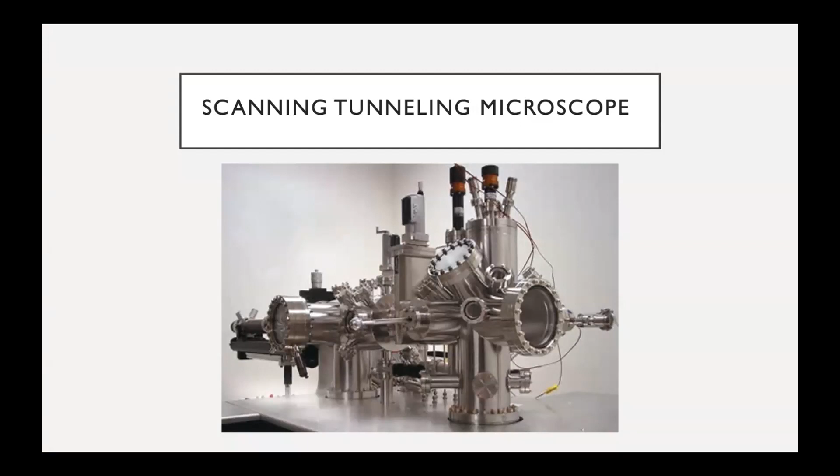Second, nanofluid, with my friend Abdulaziz. Assalamu alaikum warahmatullahi wabarakatuh. My name is Abdulaziz Al-Ghamdi, and today I will be presenting nanofluids. Nanofluids are just fluids containing nano-sized particles, which can be designed and engineered to serve different functions. It is also considered as the future of heat transfer fluid. They are expected to give better thermal performance than conventional fluids due to the presence of nanoparticles which have high thermal conductivity. Next slide please.

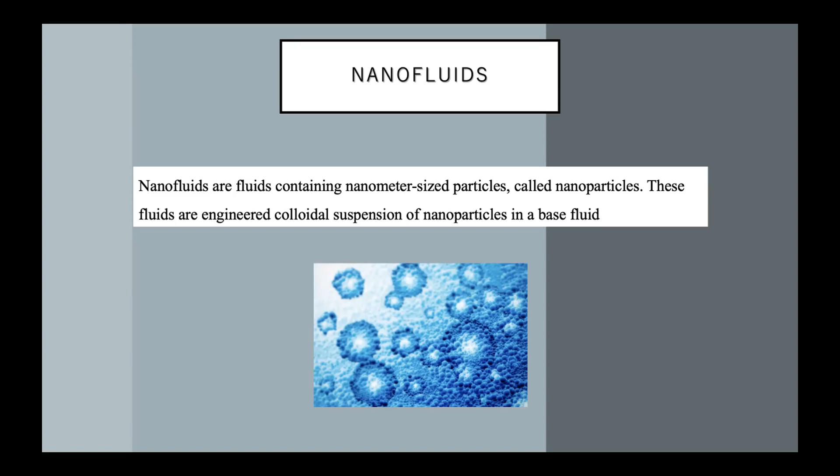Types of nanofluids. Nanofluids can be classified into 4 distinct categories based on the type of dispersed particles: metal nanofluids, metal oxide, metal hybrid, and carbon nanofluids.

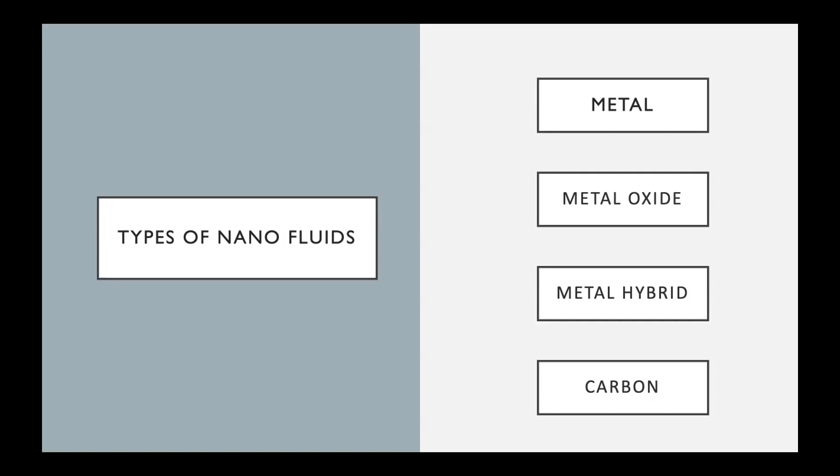Next slide please. These are some applications of nanofluids in the heat transfer field. Number 1 is microelectronics. The second one is fuel cells, pharmaceutical processes, engine cooling, vehicle thermal management, and domestic refrigerators.

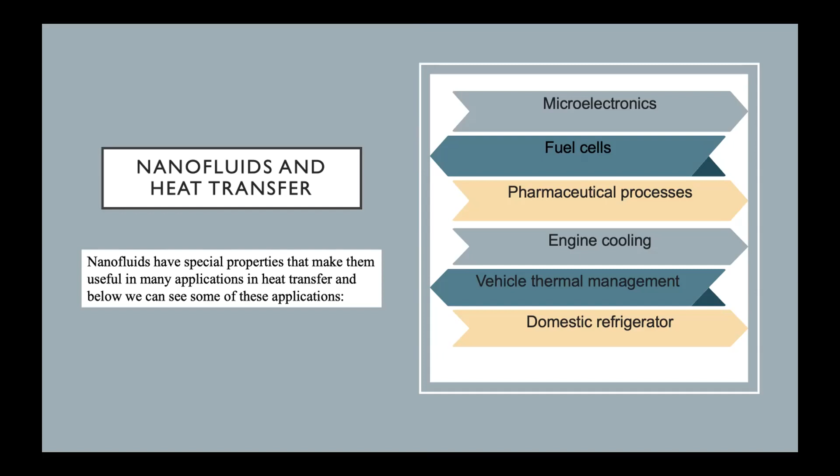Are these things potential use or is this actual application? No, this is actual application. Okay, next one.

Recent development. Recently, the focus is shifting towards improving the quality of heat transfer particles. There are other recent projects including heat exchangers and cancer therapy, lubricants, oils, and metal cutting operations.

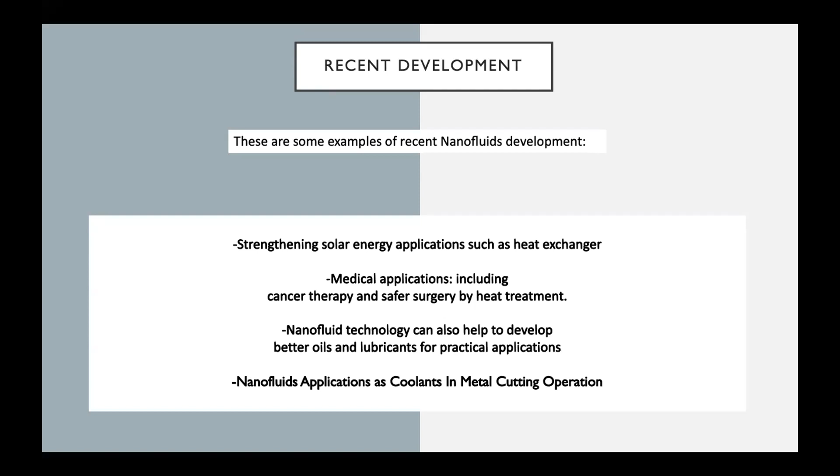The main goal of nanofluids is to achieve the highest possible thermal properties at the smallest possible concentration. It's most preferable to be less than 1% by volume, with uniform dispersion and stable suspension of nanoparticles, preferably less than 10 nanometers, in host fluids. To achieve this goal, it is vital to understand how nanoparticles enhance energy transport in liquids.

The combination of nanoparticles and base fluids can produce many heterogeneous nanofluids. The nanoparticle materials may include oxide ceramics, metal carbides, nitrides, metals, nonmetals, and layers. On the other hand, base fluids may include water, ethylene, coolants, oil, other lubricants, biofluids, and polymer solutions. Next page please.

There are two steps to produce nanofluids, called the 2-step and 1-step methods. The 2-step method is most widely used: nanoparticles, nanofibers, nanotubes, or other nanomaterials are first produced as dry powders with chemical or physical processes. Then the nano-sized powder is dispersed into the host fluid as a second step, using processes such as intensive magnetic force agitation, ultrasonic agitation, high shear mixing, homogenizing, and ball milling.

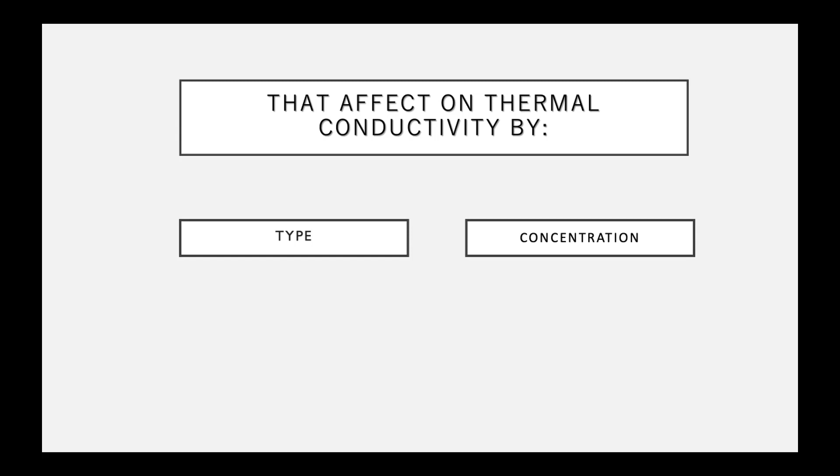Okay, now I will talk about the current and potential use of nanofluids in the industry. The advanced concepts of nanofluids offer fascinating heat transfer characteristics compared to conventional heat transfer fluids. There is considerable research on the superior heat transfer properties of nanofluids, especially on thermal conductivity and convective heat transfer.

Application of nanofluids in industries such as heat exchanging devices appears promising with these characteristics. Nanofluids can be used in the following specific areas: heat transfer nanofluids, tribological nanofluids, surfactant and coating nanofluids, chemical nanofluids, process nanofluids, and environmental or pollution cleaning nanofluids,

and bio and pharmaceutical nanofluids and medical nanofluids. Nanofluids can be used to cool automobile engines and welding equipment, and to cool high heat flux devices such as high power microwave tubes.

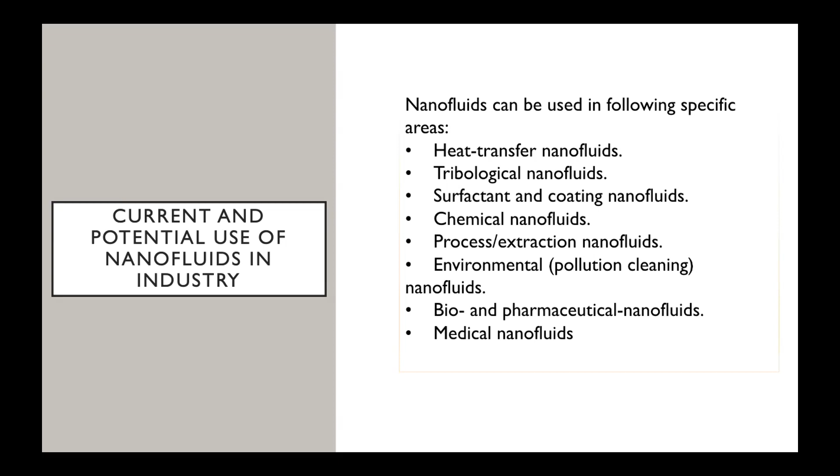Next slide, please. This is our assignment, and if there is any question, please ask.

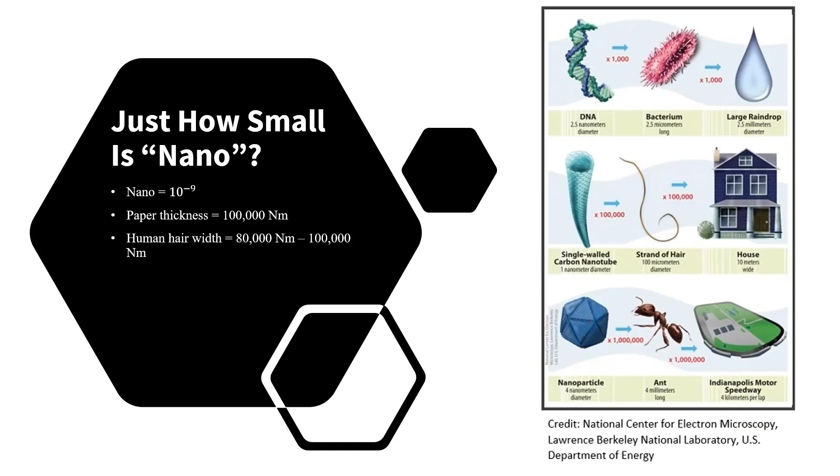Nanotechnology is not simply working at ever smaller dimensions. Actually, working at the nanoscale enables scientists to understand and utilize the unique physical, chemical, mechanical, and optical properties of materials that happen at this scale. When particles are created with dimensions of about 1 to 100 nanometers, material properties can change significantly from those at larger scales. This is the size scale where quantum effects can rule the behavior and properties of particles.

An interesting and powerful result of quantum effects at the nanoscale is the concept of tunability of properties. This concept says that by changing the size of the particle, scientists can literally fine-tune a material property of interest. At the nanoscale, properties such as melting point, fluorescence, electrical conductivity, magnetic permeability, and chemical reactivity can change as a function of the size of the particle.

Regarding the surface area, nanoscale materials have a far larger surface area to volume ratio than bulk materials. As surface area per volume increases, materials can become more reactive, as you can see in the top right bottom figure.

In biology, the nanoscale is the scale at which much biological operation occurs. Many of the inner workings of a cell naturally occur at the nanoscale. For example, hemoglobin, the protein that carries oxygen through the body, is 5.5 nanometers. A strand of DNA, one of the building blocks of life, is only about 2 nanometers in diameter.

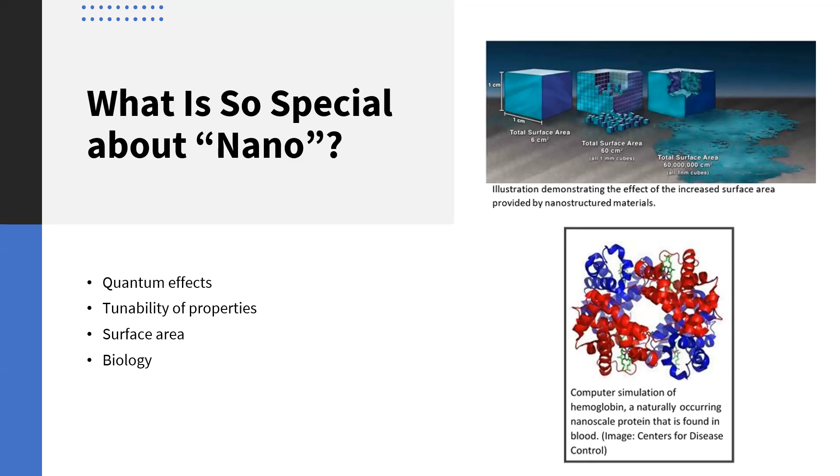It's really difficult to list all applications of nanotechnology. Applications of nanotechnology are delivering in both expected and unexpected ways. Nanotechnology is helping to considerably improve, even revolutionize, many technology and industry sectors: information technology, homeland security, medicine, transportation, energy, food safety, and environmental science, among many other fields.

Nanofluids, presented next by my friend Sulaiman. Assalamu alaikum wa rahmatullahi wa barakatuh. My name is Sayyid Muhammad Akamuddin. Today I will talk about nanofluids.

What is nanofluid? Basically, nanofluid is for superheat transfer in fluids. Nanofluid is a new class of heat transfer fluids engineered by dispersing metallic and non-metallic nanoparticles with a typical size of less than 100 nanometers in a base fluid. Nanofluid is used in many applications in industry, depending on the performance and stability of the nanofluid used in the system.

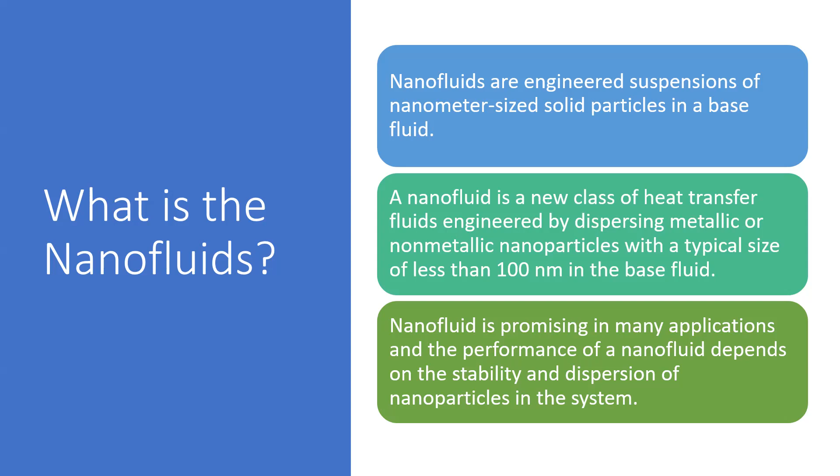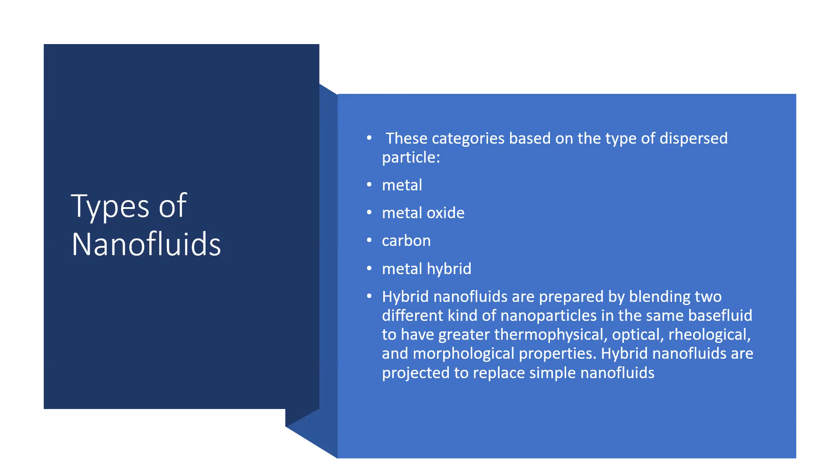Types of nanofluids: we categorize nanofluids based on the type of nanoparticle used in the fluid - metal, metal oxide, carbon, and metal hybrid. Hybrid fluids are prepared by blending two different kinds of nanoparticles in the same fluid, to have greater thermal conductivity, physical properties, and higher heat transfer than simple nanofluids.

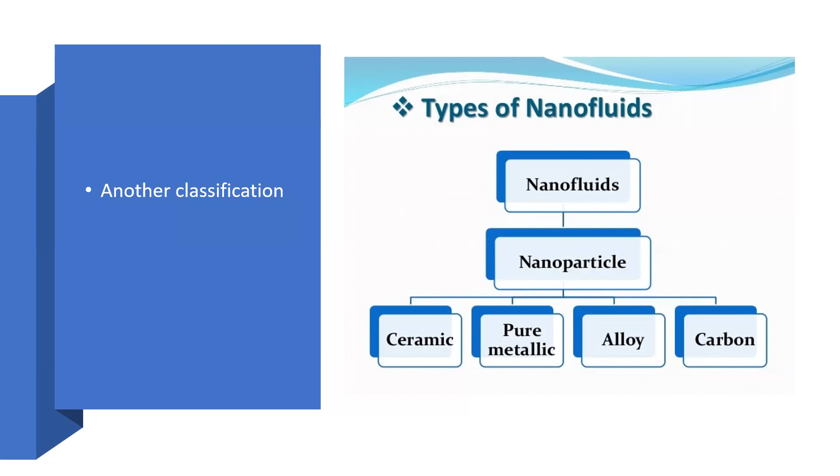There is another classification also based on nanoparticle type: ceramic, pure metal, alloy, and carbon. Why do we use nanofluids? We use nanofluids, as mentioned before, because they have high heat transfer, better than normal fluids. They can be used easily in many applications, and have better thermal performance than normal fluids due to the presence of nanoparticles in the fluid.

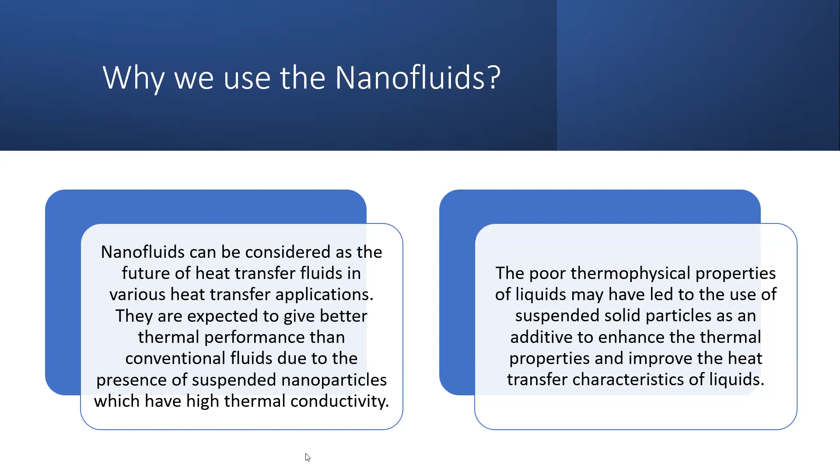Nanofluids have unique electric, magnetic, and chemical properties compared to normal fluids. Types of nanoparticles involve aluminum oxide, magnesium oxide, zinc oxide, and others. They are used in industrial applications because they transfer heat more easily than normal fluids.

How to prepare nanofluids: the first method is the two-step method, which is very common and widely used in industry to make nanofluids, nanoparticles, nanofibers, nanotubes, or any other nano materials. In this method, we use nanoparticles as powders to make nanofluids. The one-step method is another technique, but the two-step method is the most common approach used industrially.

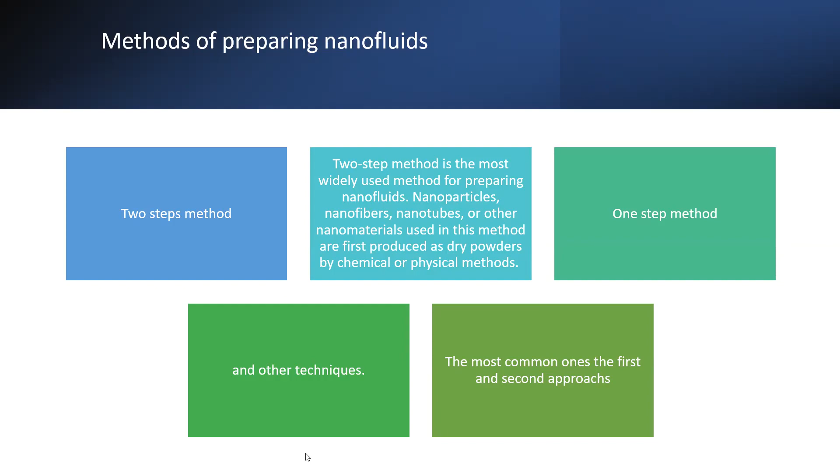How to produce nanofluids by the two-step method: we bring nanoparticles from different materials, reduce them to nano-size, and make them into a powder to dissolve in the base fluid. To avoid unwanted results from casting the nanoparticles in the fluid, we use sonication or dispersion techniques to avoid this unwanted result.

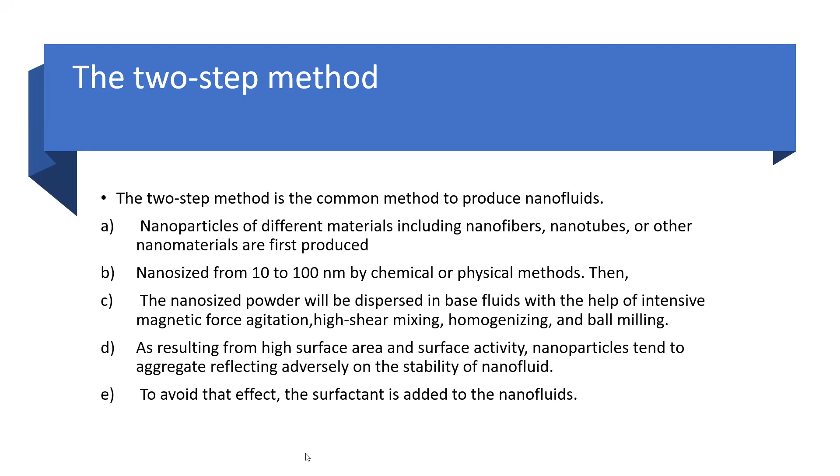Stability of nanofluids: nanofluids have more stability than normal fluids, but when preparing nanofluids, sometimes there is clustering or aggregation of nanoparticles in the fluid, so we must remove this from the fluid to get high performance of thermal conductivity in the nanofluid. Thanks, I leave you with my friend Omar.

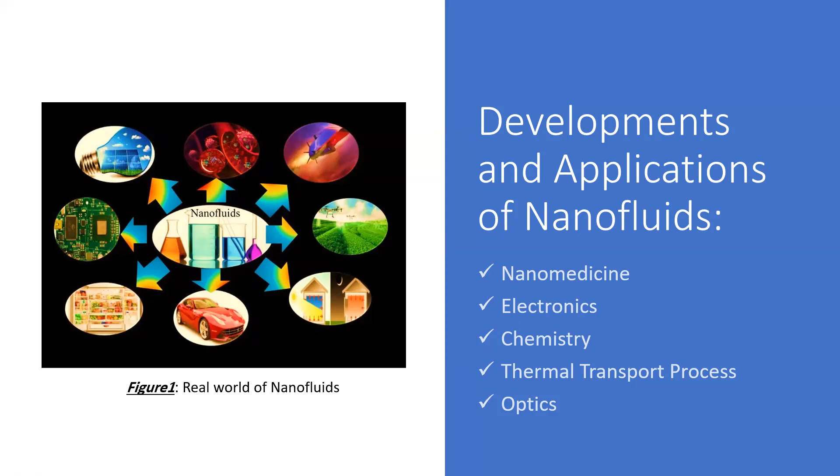Today I will talk about the development and applications of nanofluids. We have some applications here: nano medicine, electronics, chemistry, thermal transport processes, and optics.

I will talk about the thermal performance of nanofluids. Heat transfer is classified into various mechanisms such as thermal conduction, thermal convection, and thermal radiation.

In diverse fields, heat transport is a critical parameter to obtain efficient performance of machinery and devices, such as solar collectors. There are two types: flat plate solar collectors, and vacuum tube collectors.

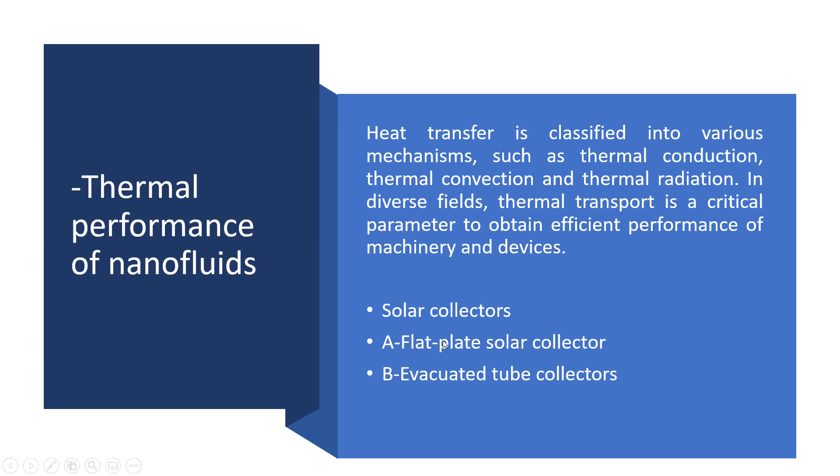A solar collector is a device that collects concentrated solar radiation from the sun. These devices are primarily used for active solar heating and allow for heating of water for personal use.

We have two points here. Solar collectors and thermal energy storage components are the two core subsystems in a solar thermal application. Second, these collectors are generally mounted on the roof and must be very sturdy, as they are exposed to a variety of different weather conditions.

Here is a flat plate solar collector. These collectors are simply metal boxes that have some sort of transparent glazing as a cover on top of a dark colored absorber plate.

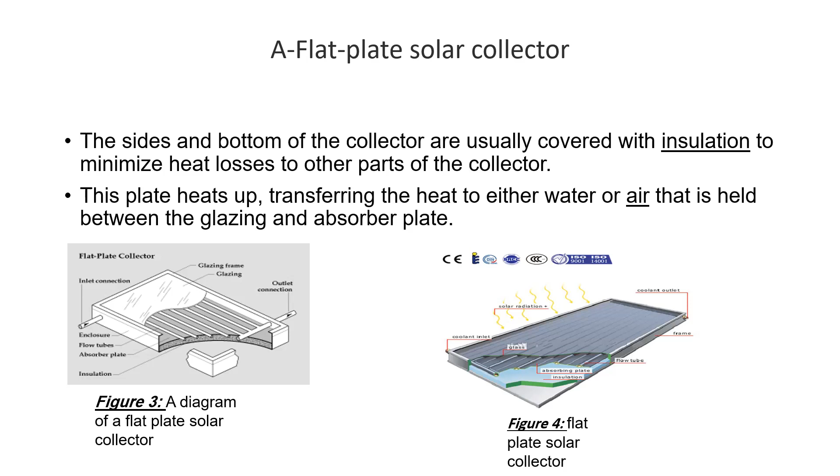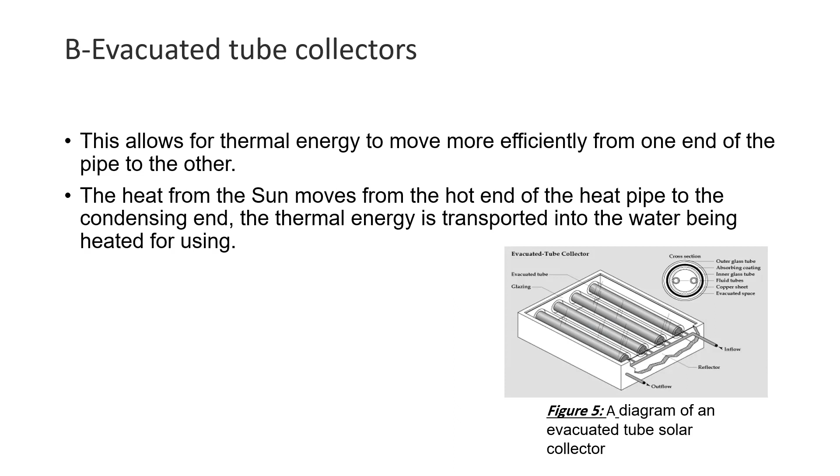The second type is vacuum tube collectors. This type of solar collector uses a series of vacuum tubes to heat water for use. These tubes utilize a vacuum, or an evacuated space, to capture the sun's energy while minimizing the loss of heat to the surroundings. I will leave you with my friend Ammar.

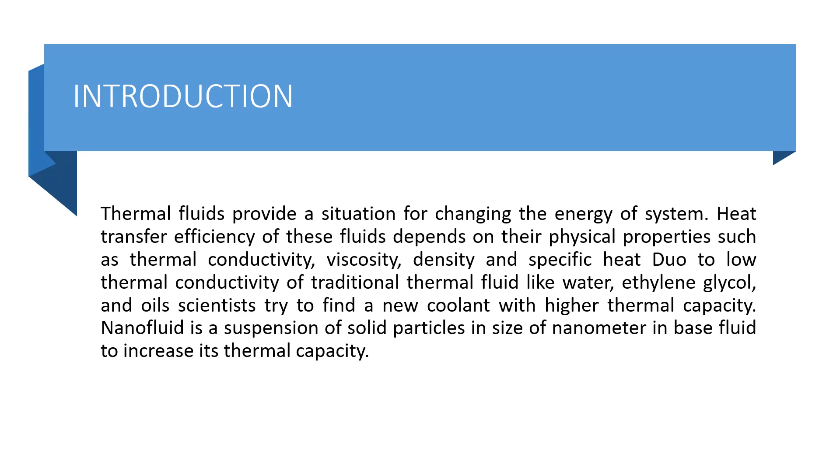What are the main physical properties of nanofluid? We have 4 physical properties: thermal conductivity, viscosity, specific heat, and density.

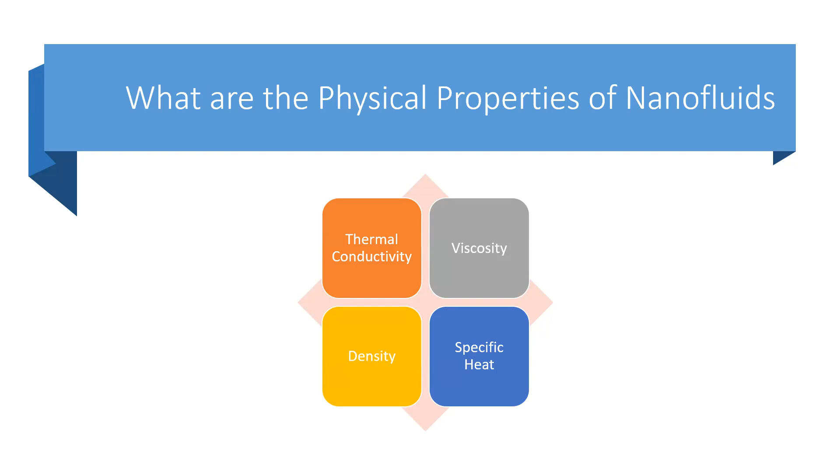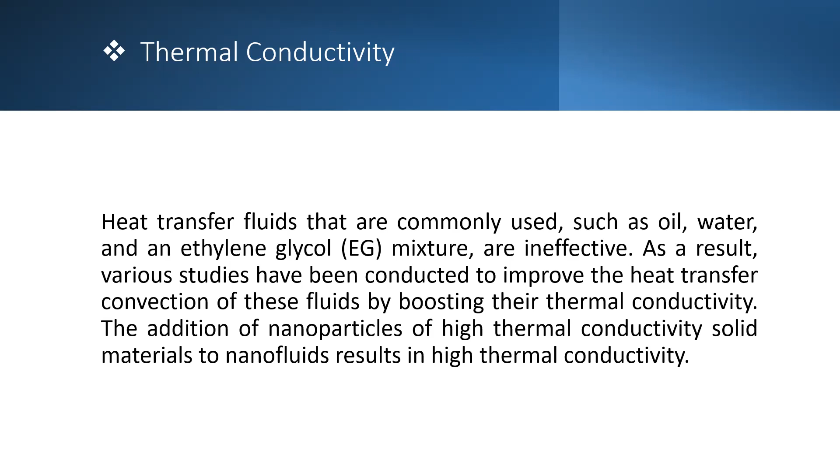I will start with thermal conductivity. Heat transfer fluids that are commonly used, such as oil and water, have been studied to improve their heat transfer convection by boosting their thermal conductivity. The addition of nanoparticles of high thermal conductivity solid materials to nanofluids results in higher thermal conductivity.

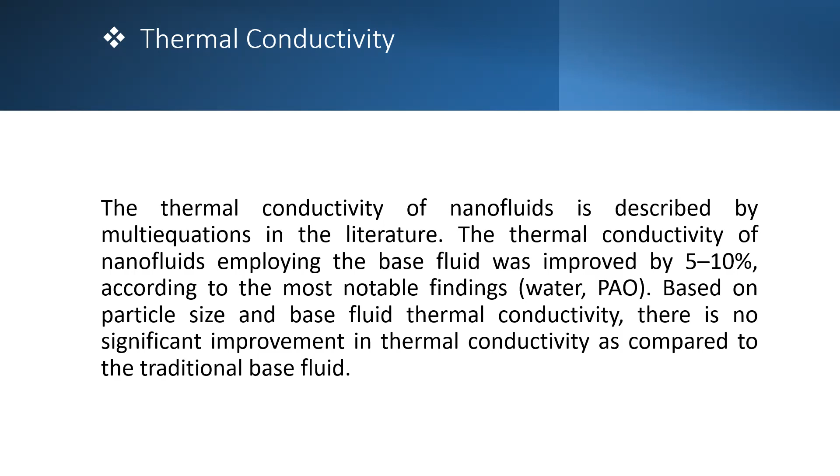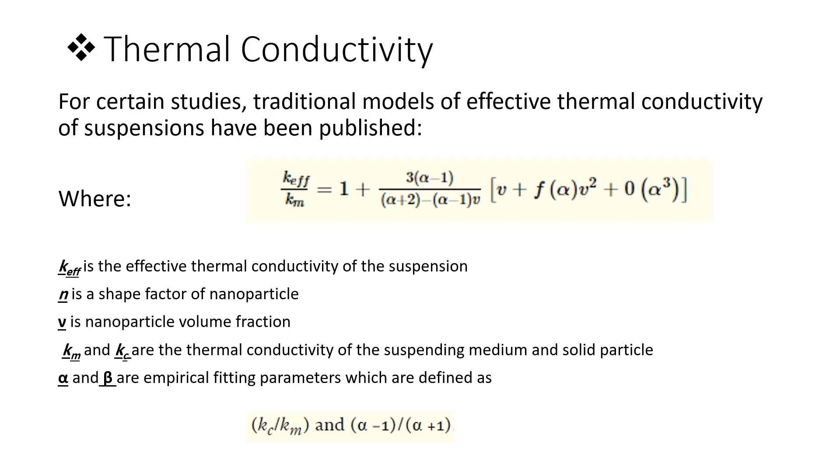Next, we have the viscosity. One of the factors that affect the behavior of nanofluids is their viscosity. Based on research on nanofluid viscosity, researchers have published an assumed equation to estimate viscosity.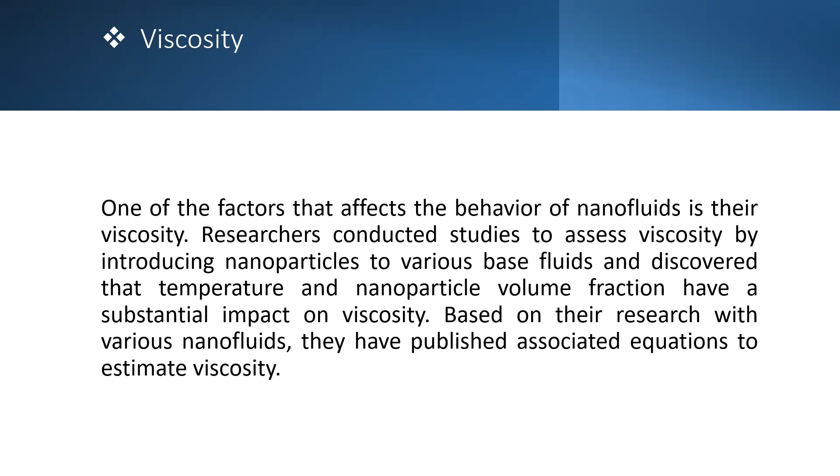Here is the equation reported by some researchers. The model is valid for spherical nanofluid particles and for phi between 0.52 and 0.7405, where phi is the volume fraction and mu is the dynamic viscosity.

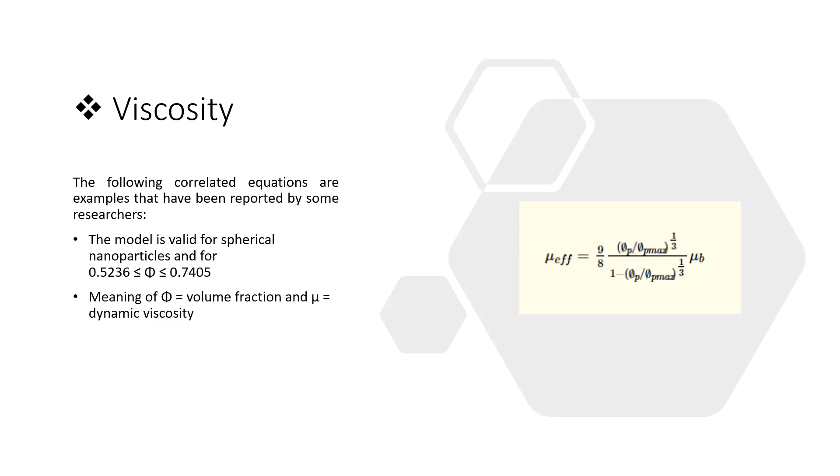Density: the density of a material is defined as its mass per unit volume. In heat transfer, density plays a critical role, as many scientists believe that increasing density causes increasing natural convection.

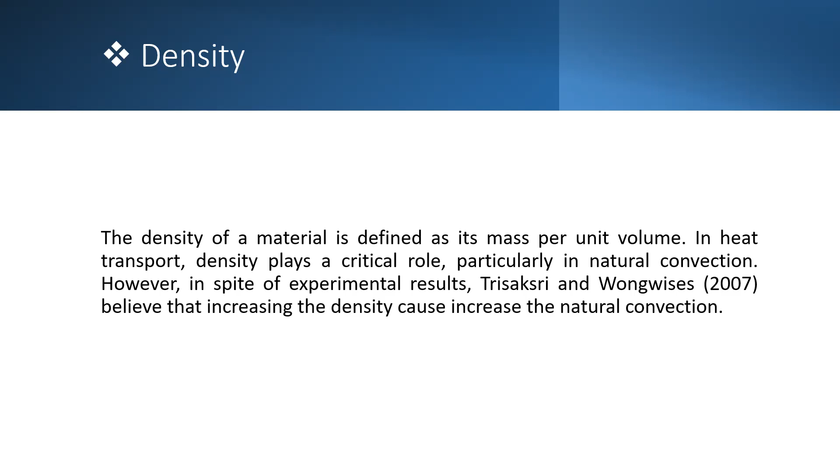Many researchers use mixture rules to calculate the density of nanofluid, as shown in this equation. The nanofluid density rises as the particle volume fraction rises.

The last physical property is specific heat. The heat energy required to raise the temperature of a unit quantity of a substance by a given temperature interval is measured by specific heat capacity, also known as specific heat. It is another significant thermal physical feature along with the others. It has an impact on the Prandtl number, heat capacity per unit mass, and heat transport in general. Metals have a lower specific heat than liquids.

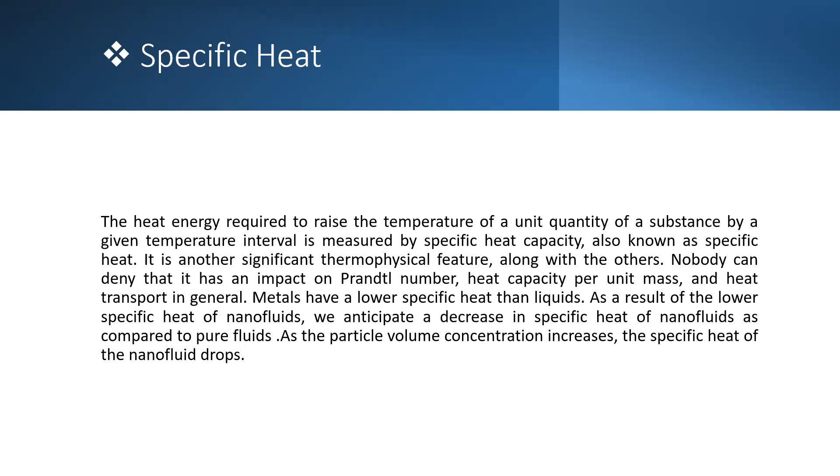As a result of the low specific heat of nanoparticles, we can say there is a decrease in specific heat of nanofluid compared to pure fluid. As the particle volume concentration increases, the specific heat of the nanofluid drops.

Here is the equation to calculate the specific heat of the mixture. A study from 2007 suggests a formula, the mixture formula, shown here.

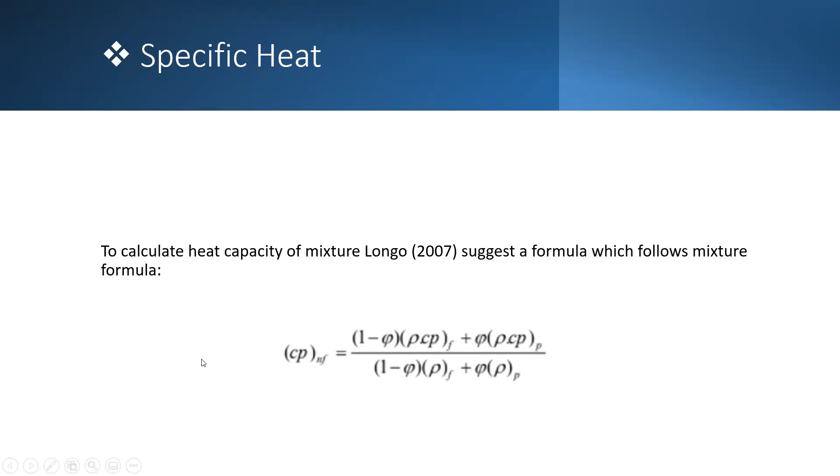And now I will leave you with my friend Faris.

My name is Faris. Today I will talk about current and potential uses of nanofluids in industry.

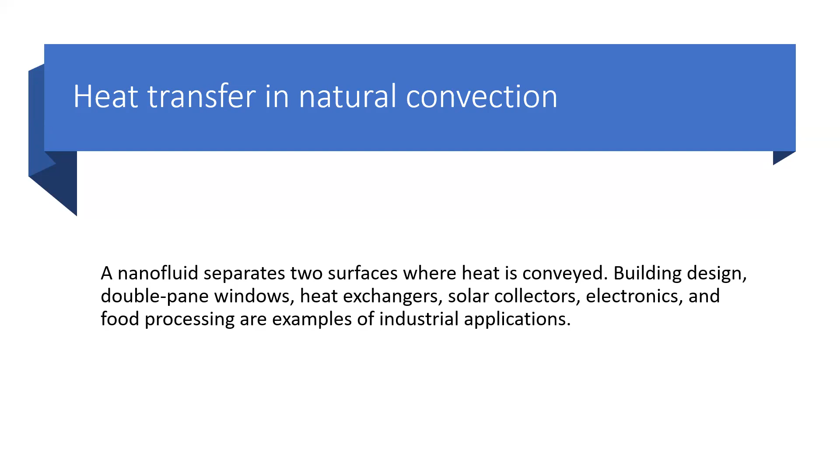Heat transfer in natural convection: a nanofluid separates two surfaces where heat is conveyed. There are many examples of industrial applications, including electronics, solar collectors, and heat exchangers.

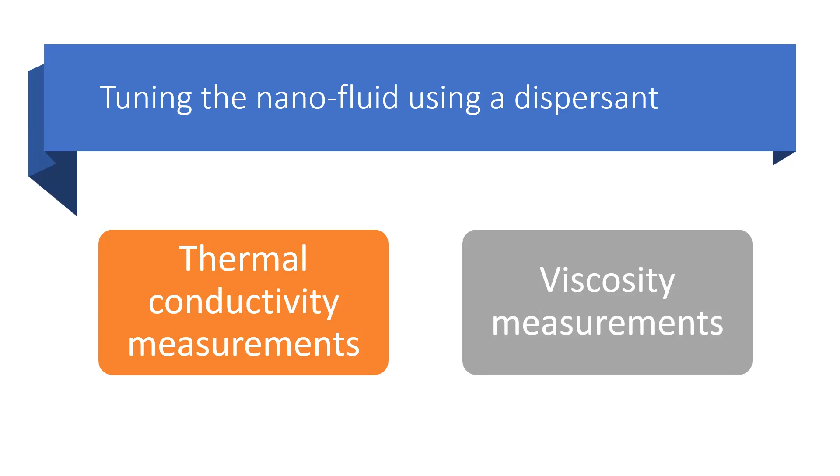There are two types of characterizing the nanofluids using a dispersant: thermal conductivity measurements and viscosity measurements.

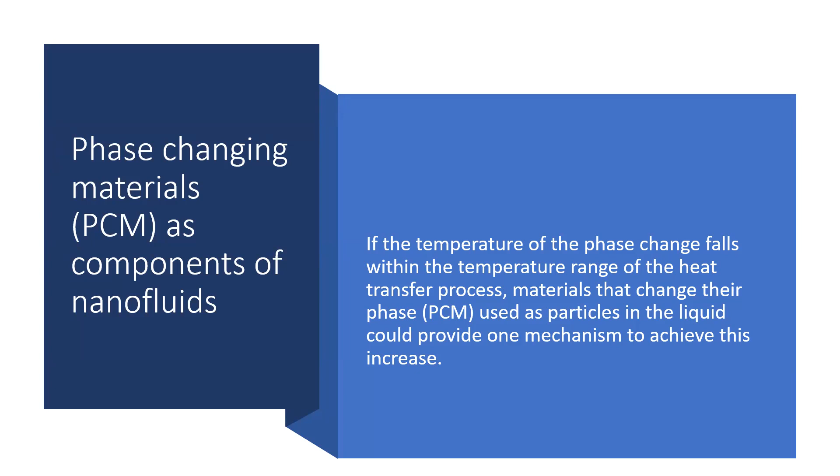Phase changing materials as a component of nanofluids: if the temperature of the phase change falls within the temperature range of the heat transfer process, materials that change their phase, used as particles in the liquid, could provide one mechanism to achieve this increase.

Reduced conductive heat transfer in the nanofluids: if the process is correctly tailored, nanoparticle systems dispersed in base fluids may give highly specialized solutions for certain heat transfer jobs. The consequence is that the application must be determined first, followed by the development of a nanofluid tailored to that application.

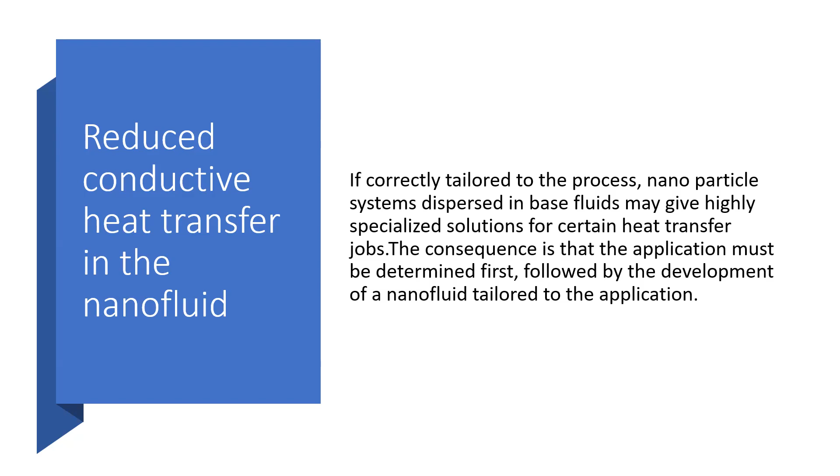Thank you for listening. If you have any questions, please ask, no hesitation.